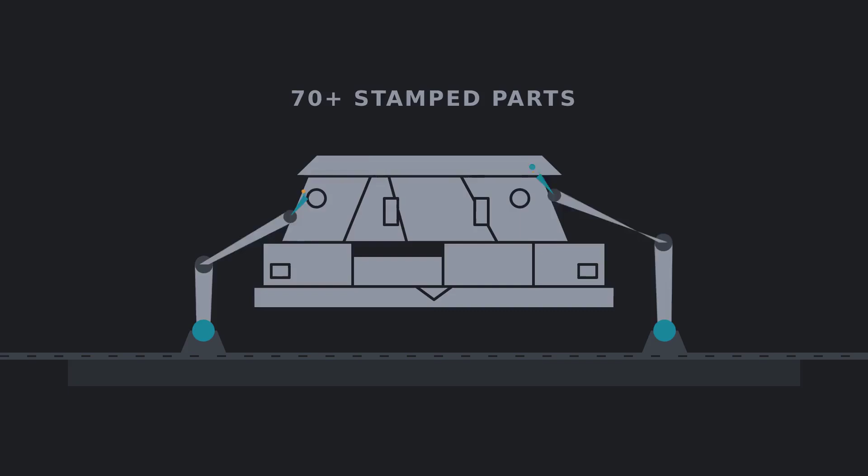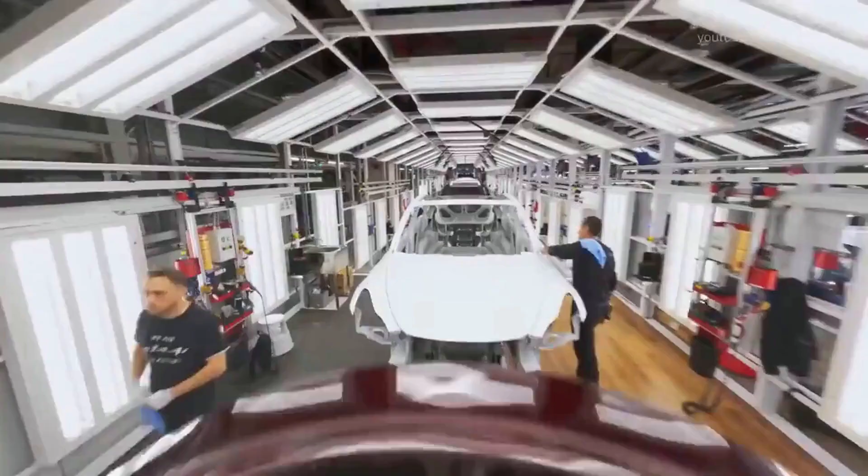Tesla's next Gigapress is being described as the machine that deletes welding robots from the factory floor, casting huge sections of a vehicle in one shot instead of stitching hundreds of parts together. That sounds like the next manufacturing earthquake, but there is a problem. The confirmed public machines are still measured at 6,000 tons and 9,000 tons of clamping force, not the 50,000-ton monster spreading through viral posts.

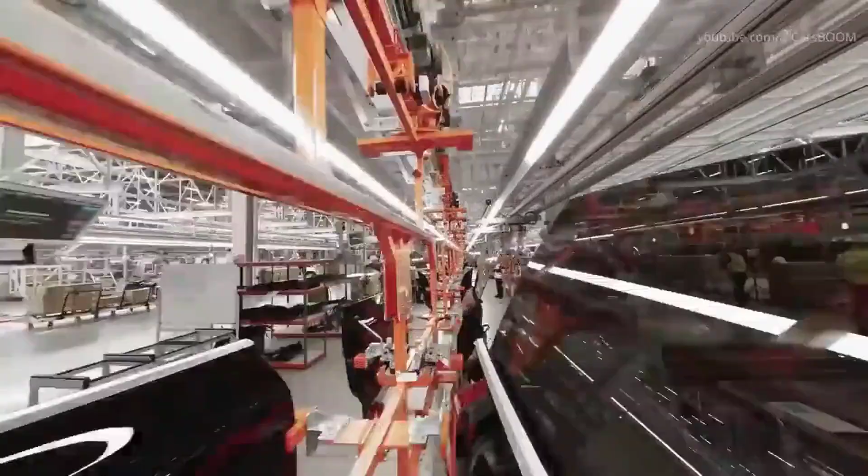So the mystery is not whether Tesla changed manufacturing. It did. The real question is what changed in 2026, what stayed exaggerated, and which breakthrough matters more than the myth. The biggest 2026 factory rumor is not the giant press. It is the claim that Tesla removed half of its welding robots because one new casting machine made them obsolete. That version is too simple, and the location is wrong.

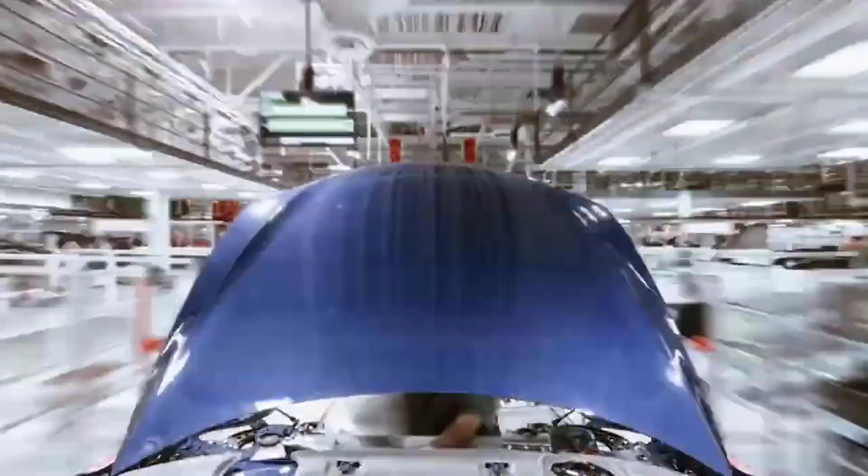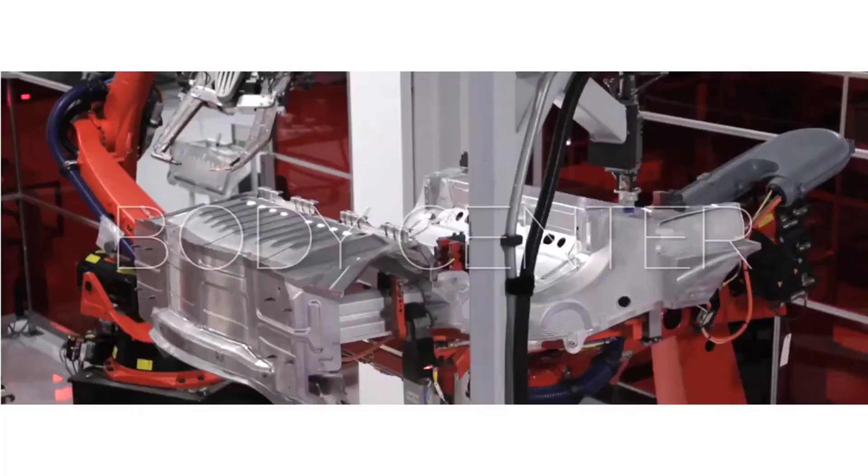The real Fremont story was about a product change. Tesla ended Model S and Model X production there, then repurposed that floor space for Gen 3 Optimus production. That matters because a line built for humanoid robots does not need the same body shop layout as a car line. Removing or relocating welding equipment in that building would not prove that a new vehicle process deleted robots. It would prove that the factory stopped building those vehicles in that area.

Cybercab belongs to a different story. Tesla has tied that vehicle to Giga Texas and the unboxed manufacturing system, not Fremont. In the unboxed approach, large modules can be built in parallel and joined later, instead of moving a full vehicle body through a long traditional sequence. That changes where labor, automation, and joining equipment are used. So if someone shows Fremont changes and says, this is Cybercab production, the timeline does not line up.

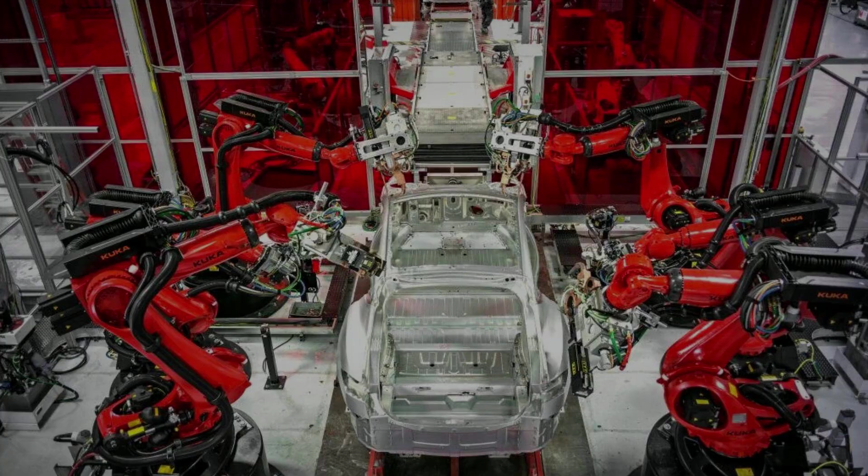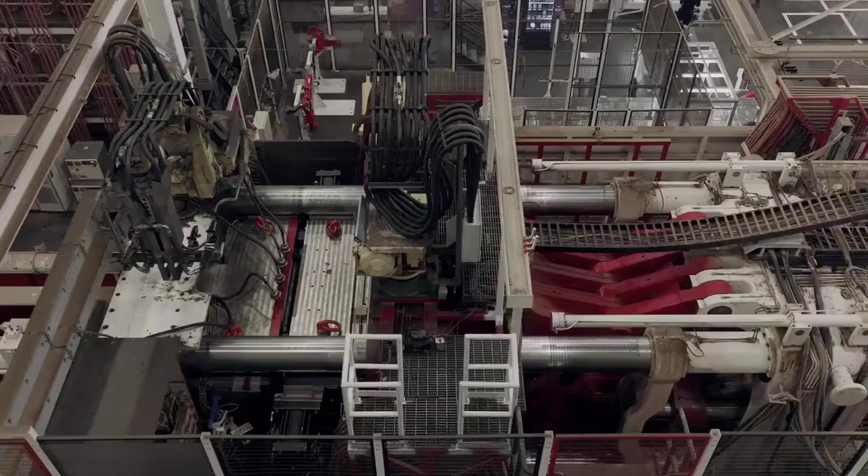Fremont's conversion points toward Optimus, Cybercab points toward Texas. Mixing the two creates the illusion that one mysterious machine arrived and erased a huge section of the factory overnight. The real breakthrough is more specific. Tesla has been reducing the number of parts, welds, fixtures, and handling steps needed to assemble a vehicle structure. Castings helped start that shift, but they are only one part of it.

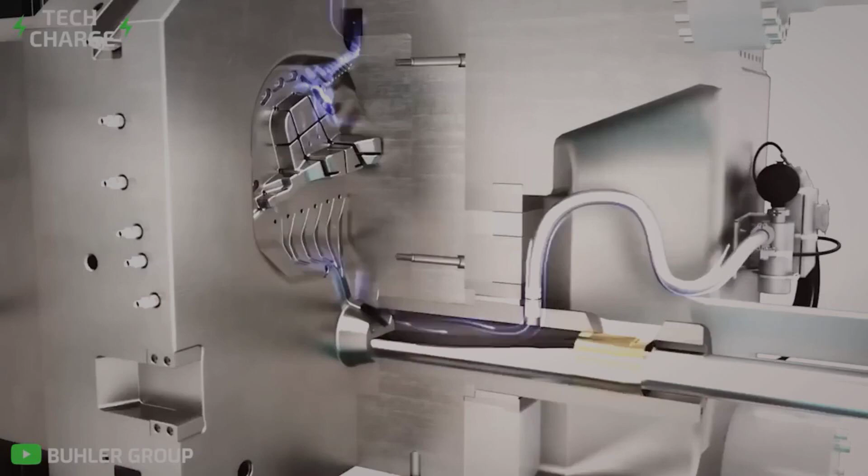If welding robots were not simply deleted, the better question is this: what actually reduced the need for traditional welding? The answer starts with Idra, an Italian machine builder that had spent decades making high-pressure die-casting equipment for the automotive industry. Tesla wanted something more extreme than a normal aluminum casting cell. It wanted to turn a large section of the vehicle body into one shot of molten metal, squeezed into a die with enormous force. That was not a normal supplier request.

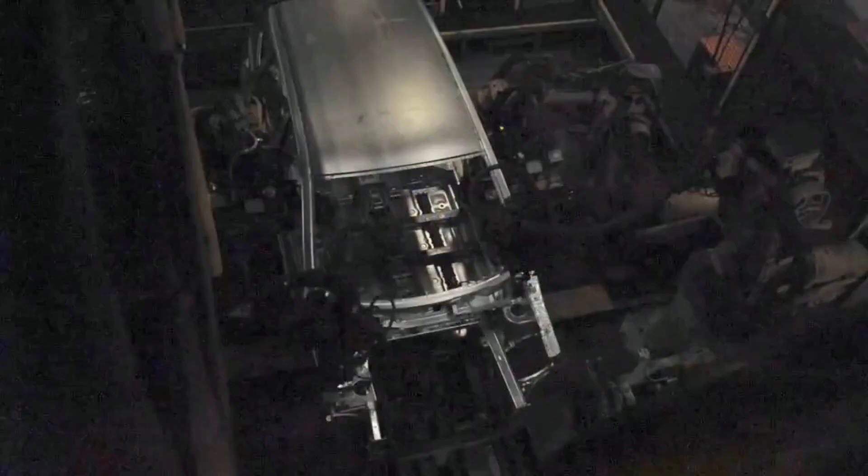Traditional body shops were built around stamped steel parts. Panels and structural pieces were pressed, positioned in fixtures, and joined by welding robots. The process worked, but it created long chains of parts, measurements, clamps, weld points, inspections, and correction loops.

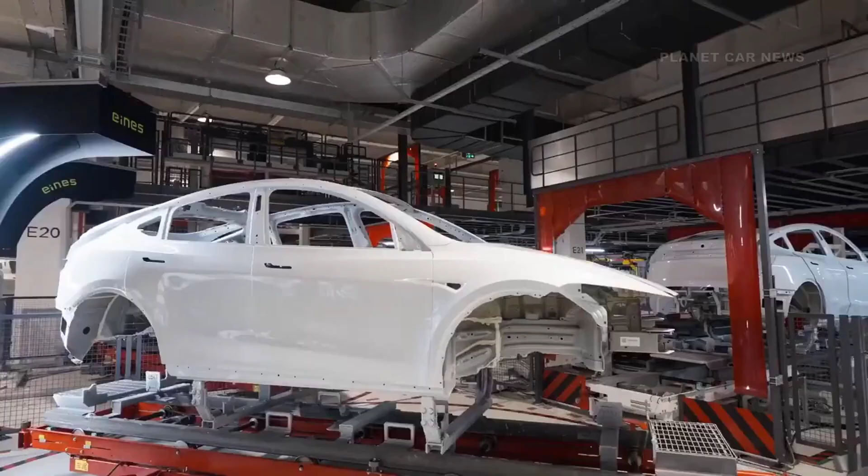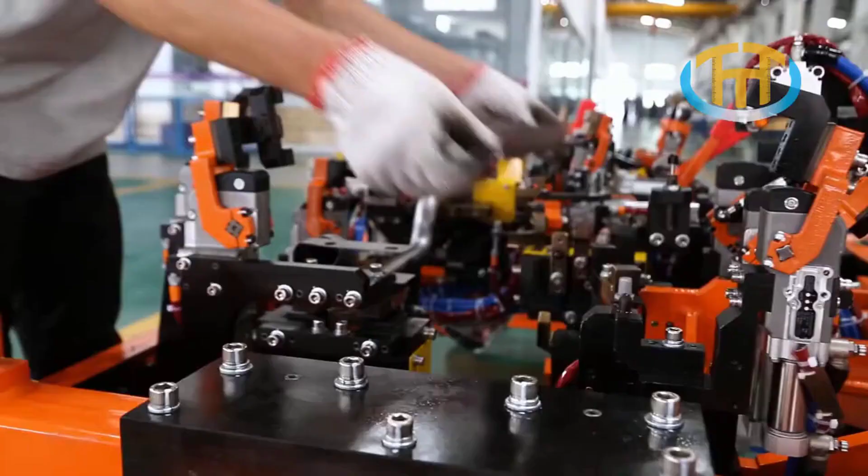Tesla pushed Idra toward a much larger machine, and the first verified breakthrough showed up on the Model Y. The rear underbody, which had previously been assembled from around 70 separate pieces, could be replaced by one large casting. That single change removed a whole section of part handling from the factory. The impact was not just that 70 became one. Every removed part also meant fewer edges to align, fewer fixtures to hold them, fewer welds to make, and fewer places where tiny dimensional errors could stack up.

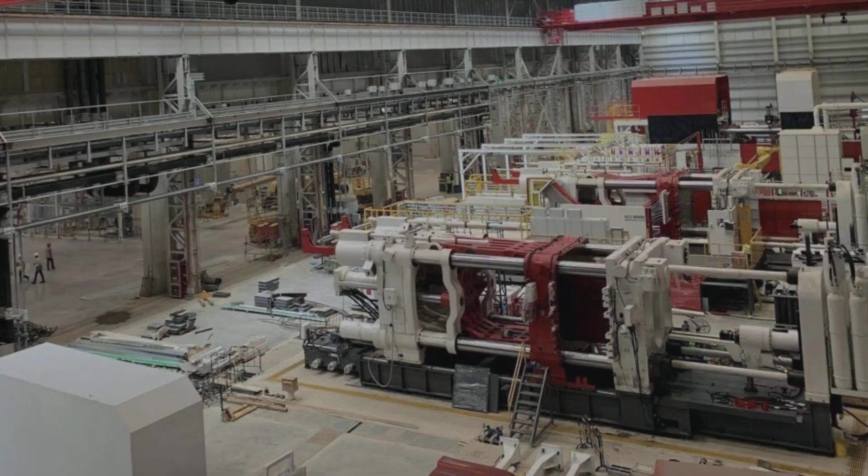In a welded structure, one small variation can force the next station to compensate. In a casting, the geometry comes out of the die already tied together. That is why Giga casting changed the body shop. It moved some of the work upstream into the casting process, before the body reached the welding line. Instead of asking robots to join dozens of components into a rear structure, Tesla could install a large finished section and build around it.

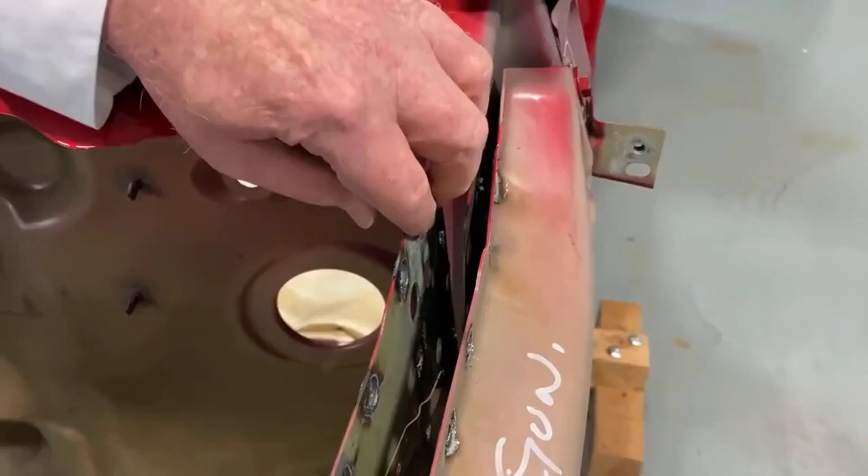There were potential vehicle benefits too. A continuous casting can improve stiffness because the load paths are not interrupted by as many joints. It can also simplify crash structure design because engineers control more of the shape as one piece rather than stitching many smaller pieces together. But this was never magic, and it was never as simple as pressing one button and deleting a factory.

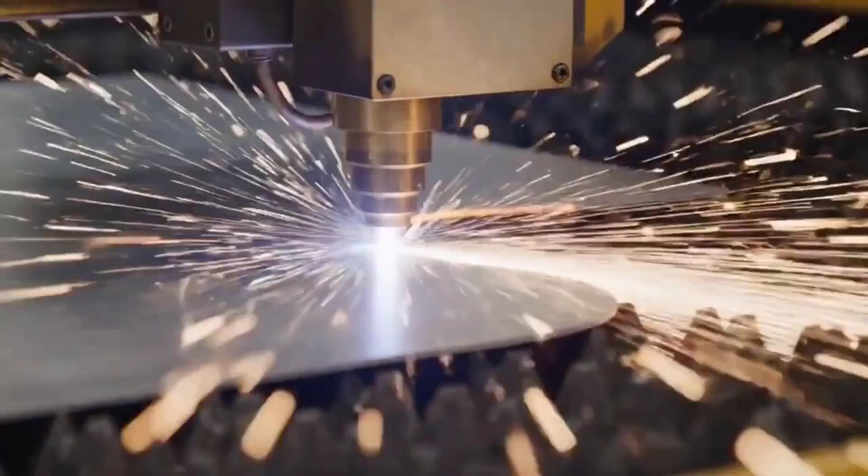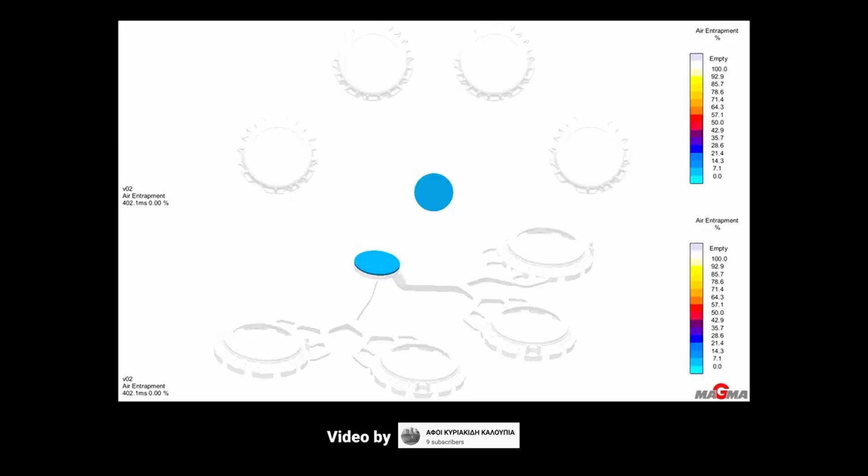Giga casting replaced a messy welding problem with a different industrial problem: molten aluminum, massive dies, cooling rates, porosity, repair limits, and machines so large that the factory has to be designed around them.

Inside the casting cell, the process starts before the press ever moves. Aluminum alloy is melted in large furnaces at temperatures high enough to keep it fully liquid, then held within a controlled range so it flows correctly without damaging the metal quality. If the melt is too cold, it may not fill the die.

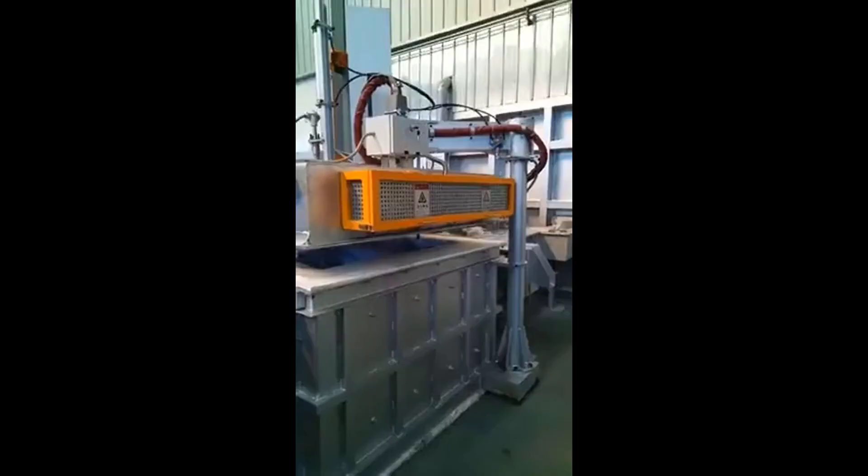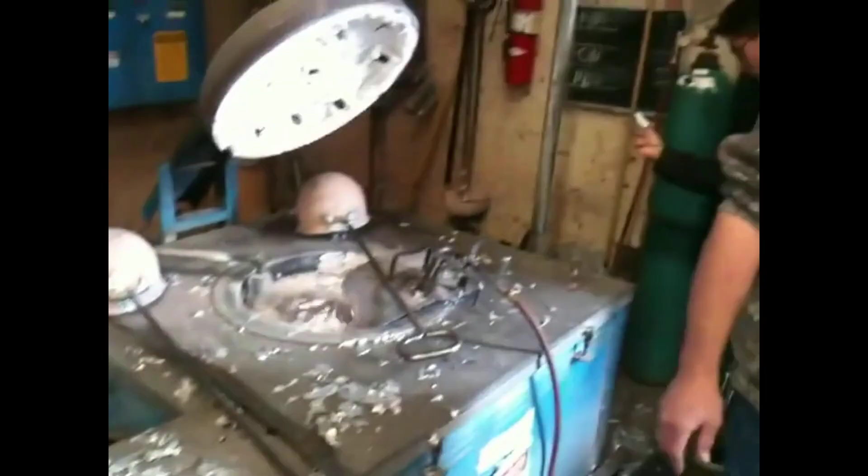If it is too hot, it can increase die wear and create other problems downstream. The molten aluminum is also cleaned before injection. It can pass through filtration systems that catch solid impurities, while degassing removes dissolved hydrogen that would otherwise form bubbles inside the casting. Operators and sensors watch for contamination because one oxide film or trapped pocket of gas can become a weak point in a structural part.

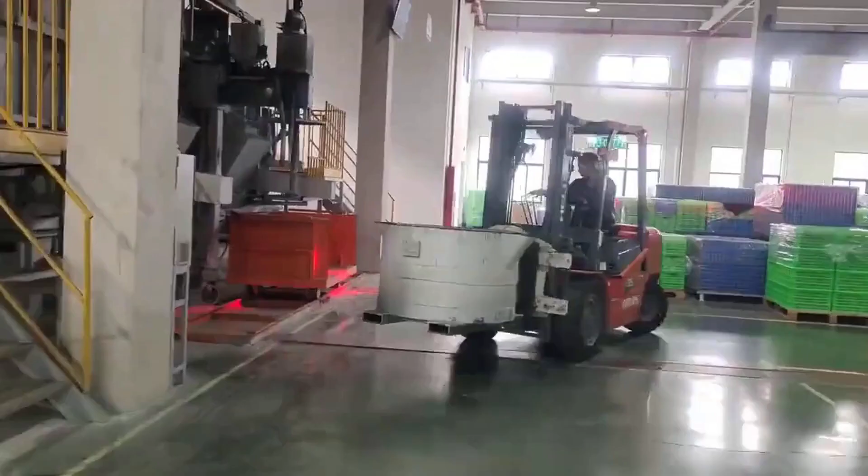At the press, the die is not just an empty mold waiting for metal. It has to be heated, sprayed with release agent, and checked, so the casting will separate cleanly after solidification. The release agent also helps manage temperature on the die surface because cooling has to be fast enough for production, but controlled enough to avoid distortion and defects.

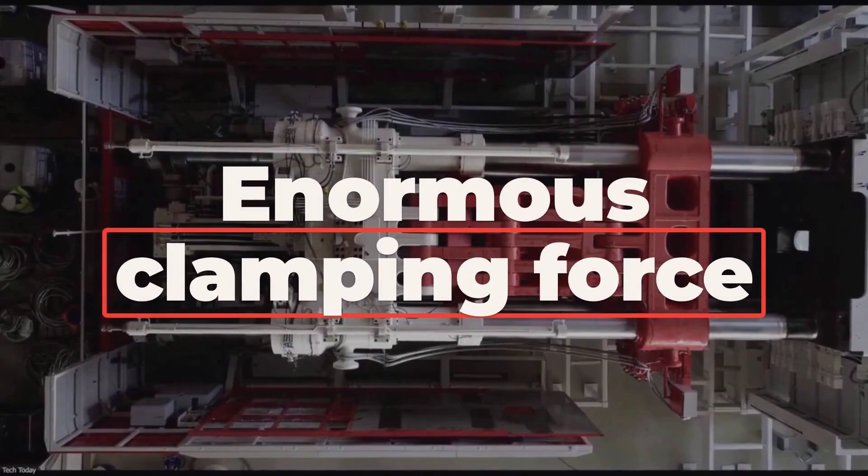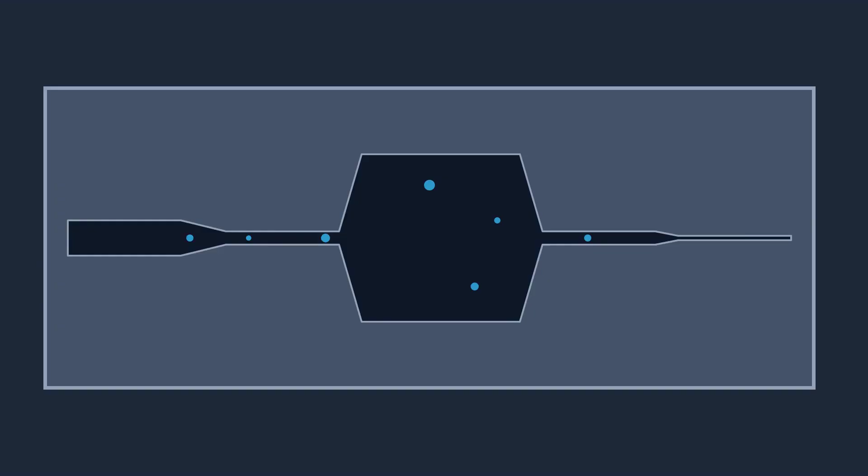Then the two halves of the die close under enormous clamping force. This force matters because molten aluminum is about to be injected at high speed and high pressure. If the die opens even slightly during the shot, the result is flash, scrap, or damage to the tool. Vacuum systems help pull air out of the cavity before and during filling, reducing the chance that gas gets trapped as the metal rushes through thin passages and thick structural sections.

The injection itself is violent and precise. A measured amount of molten aluminum is pushed into the die, fills the complex shape, and begins freezing almost immediately against cooled steel surfaces. Internal cooling channels carry heat away from the die, helping the part solidify quickly enough for a production rhythm. A real cycle is not a fantasy where one machine spits out multiple car bodies every few seconds. For a large automotive casting, the cycle is commonly discussed in the range of around 80 to 90 seconds, or roughly 1 to 2 minutes depending on the part, alloy, cooling strategy, and handling system.

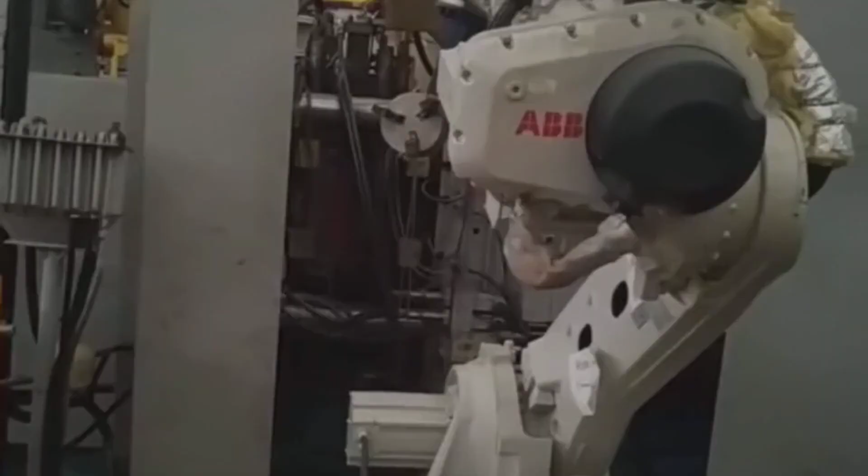After the die opens, robots remove the casting, trim excess metal, and send the part for inspection. The impressive part is not just that a huge component comes out in one piece. It is that the machine repeats this sequence over and over while controlling heat, pressure, vacuum, timing, and metal cleanliness tightly enough for structural use.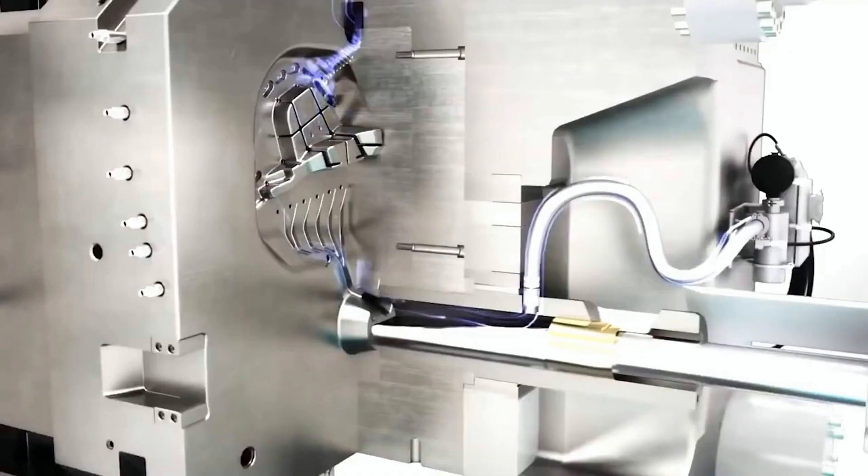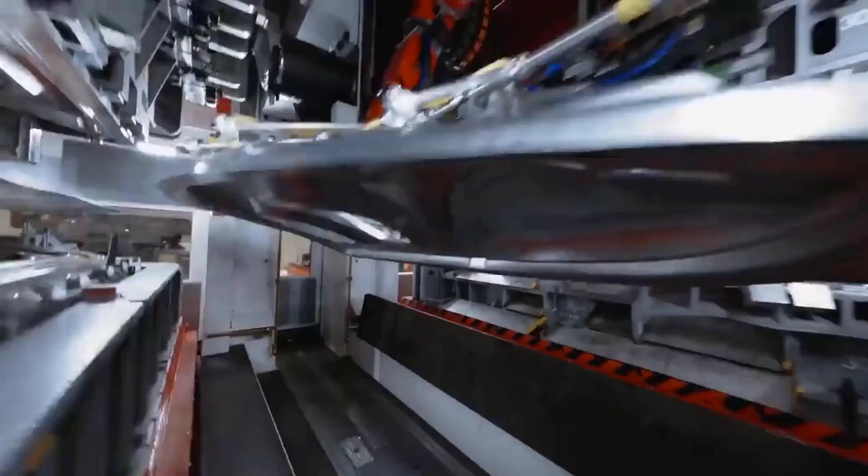And that leads to the obvious question: if this process is so powerful, why can Tesla not simply scale it to 50,000 tons overnight? A 50,000-ton Gigapress sounds like the next logical step, only if clamping force is treated like horsepower on a spec sheet. In real manufacturing, that number is not a confirmed Tesla machine, not a verified production program, and not a known target for the next vehicle platform. It is better understood as a dramatic way to describe the dream of casting even larger sections of a car.

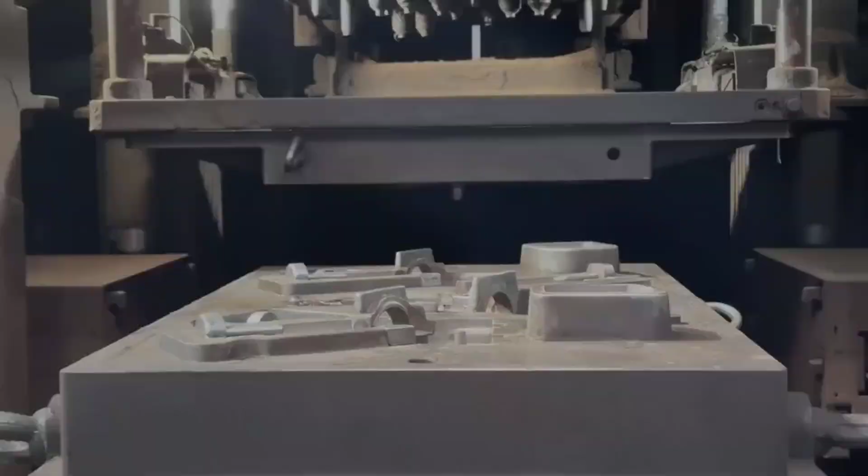The largest confirmed Tesla-related Gigapress is the 9,000-ton machine used for Cybertruck parts. For Model Y, Tesla uses presses around 6,000 tons. Those are already among the most extreme die casting systems ever applied to mass-market automotive structures, and they required new tooling, new alloys, new quality checks, and new factory choreography.

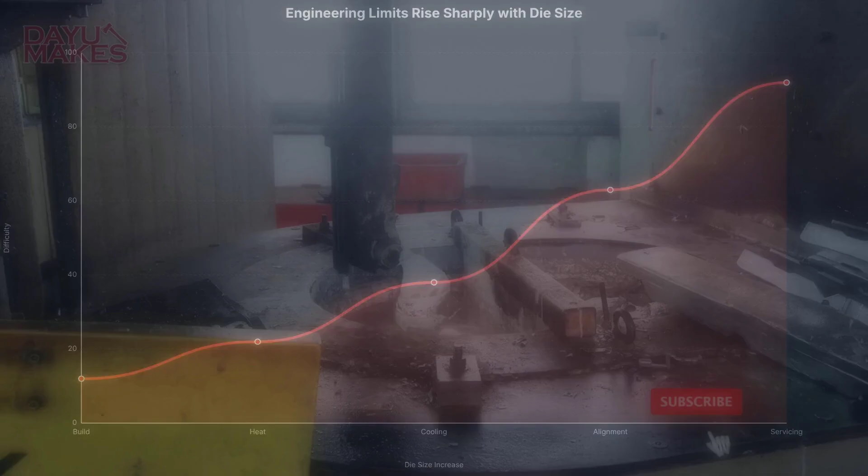Scaling from 9,000 tons to 50,000 tons is not a casual upgrade. A larger die becomes harder to build, heat, cool, align, and service. Molten aluminum has to flow across longer paths without freezing too early, trapping gas, tearing, or creating weak zones. Thick and thin sections cool at different rates, which can cause distortion or internal stress.

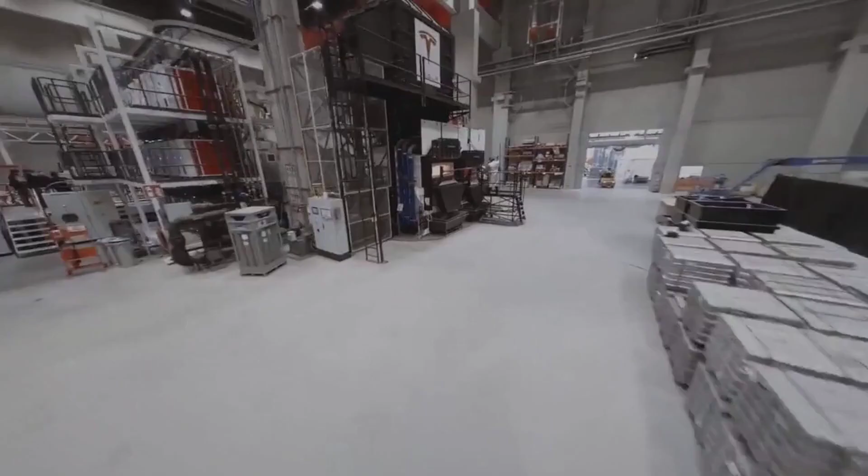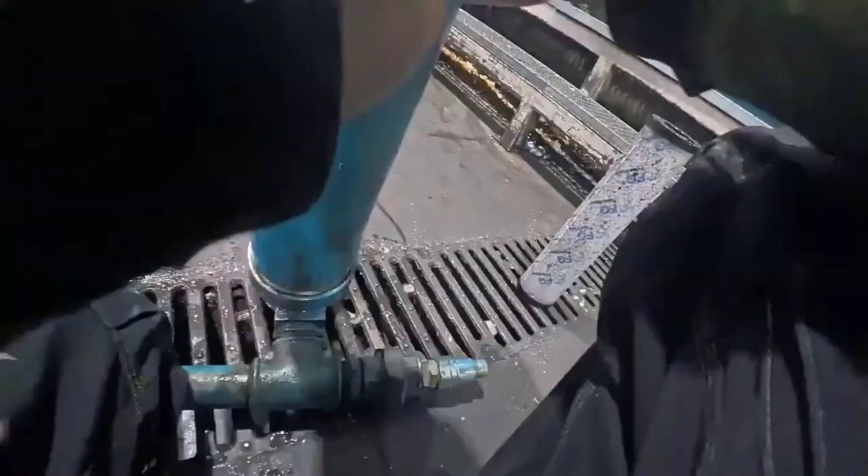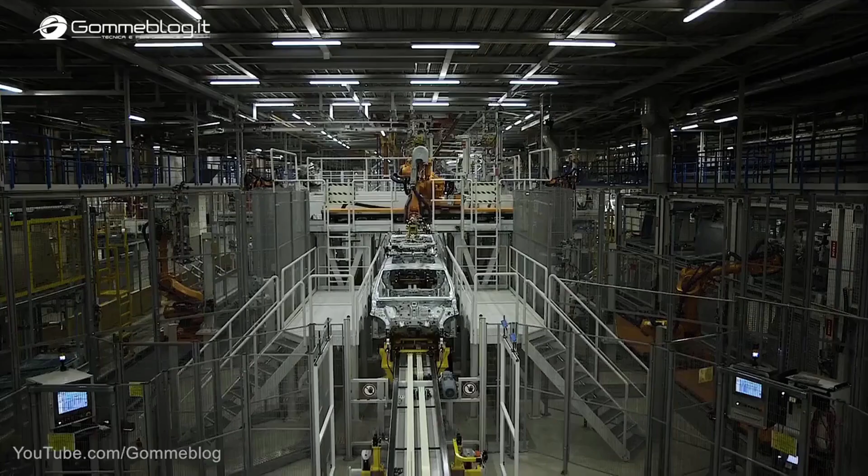The press itself would also reshape the factory around it. Bigger clamping force means larger foundations, heavier platens, more powerful hydraulics, more complex extraction systems, and much higher maintenance demands. If a die that large fails, the downtime is not a small repair problem. It can become a production bottleneck measured in lost vehicle output. Cost matters too. A casting only makes sense if it reduces parts, labor, tooling, and assembly time enough to justify the risk. At some point, making the press bigger can create new problems faster than it removes old ones.

The real story is not that Tesla has secretly deleted welding robots with a mythical 50,000-ton monster. The real story is that casting has already changed the boundary between body design and factory design. The next generation is less about one gigantic press and more about a new manufacturing architecture built around fewer parts, shorter lines, and faster assembly.

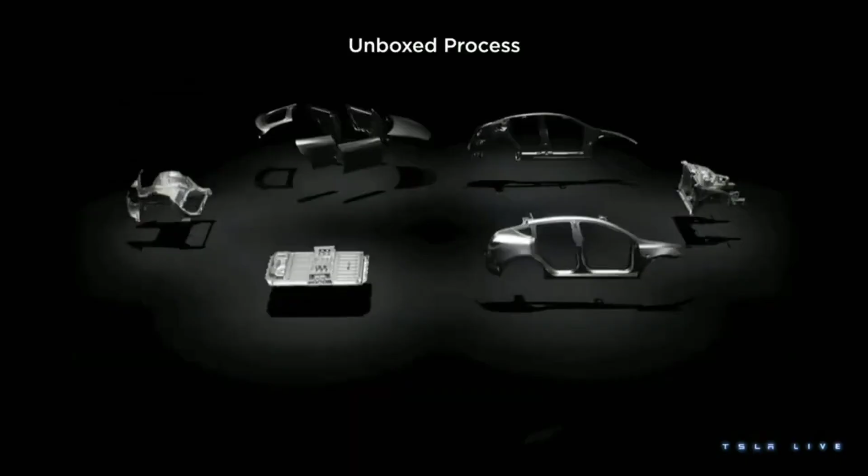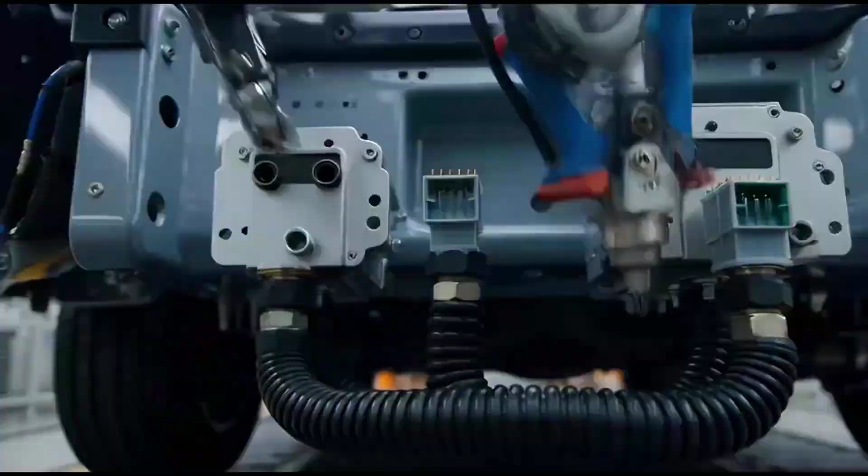The manufacturing headline behind Cybercab is not a bigger casting machine. It is Tesla's unboxed assembly method, because that changes the order in which the car is built. A traditional auto factory treats the vehicle like one object moving through a long sequence. The body is assembled, then painted, then fitted with wiring, interior parts, glass, seats, battery, suspension, and final trim. Each station depends on the station before it. If one step slows down, the delay travels down the line.

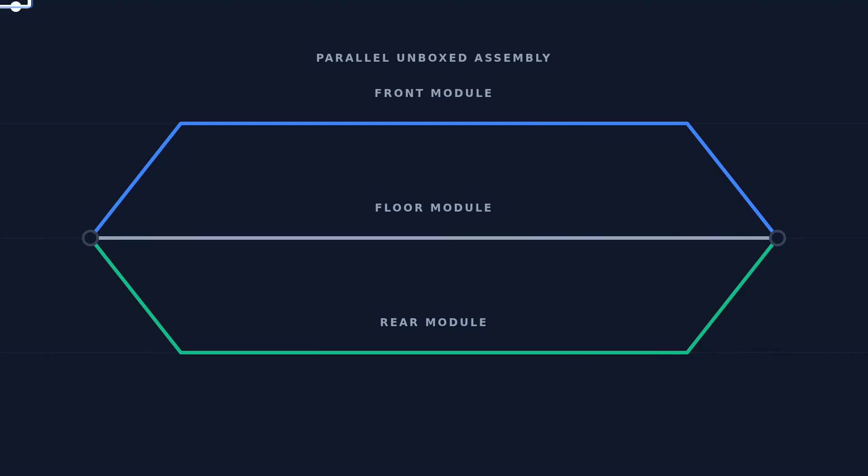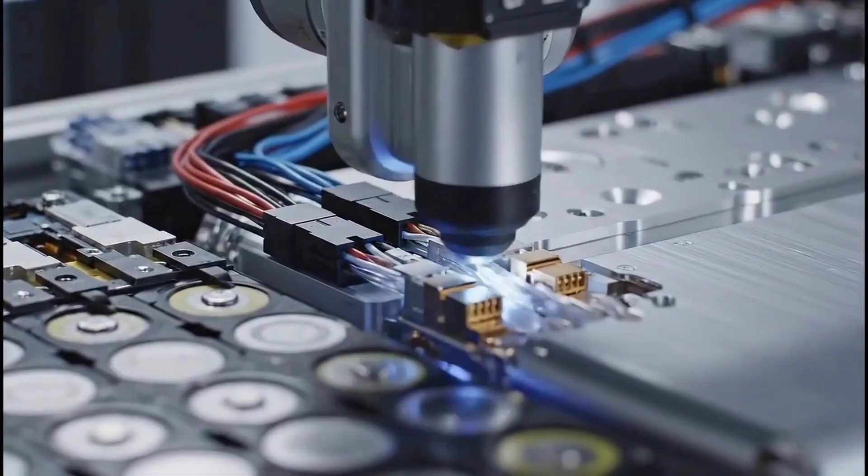Unboxed assembly breaks that pattern. Instead of pushing one unfinished car through a single path, Tesla wants to build major sections separately at the same time. The front structure, rear structure, battery pack, interior module, and side assemblies can each move through their own work areas. When those modules are ready, they are brought together near the end.

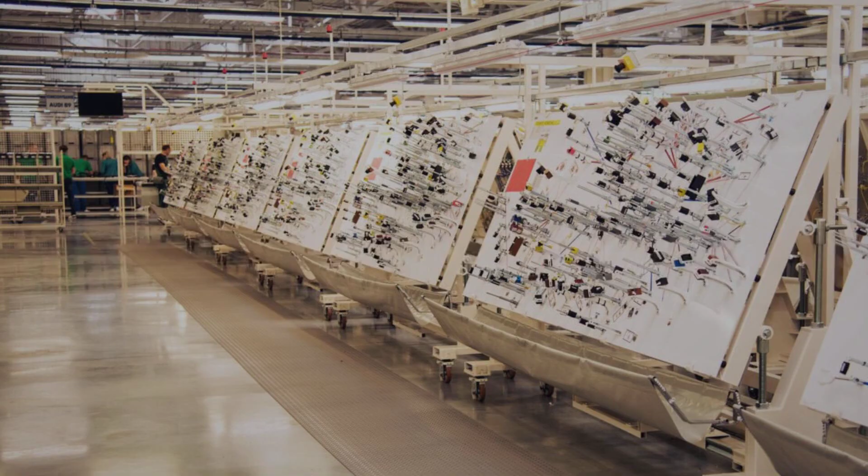That sounds simple, but it changes the factory layout. Workers and robots no longer need to crowd around a nearly complete vehicle in a narrow sequence. More tasks can happen in open access positions before the car becomes a closed shell. Seats, wiring, electronics and trim can be installed when the module is easier to reach, rather than after the body has already limited access.

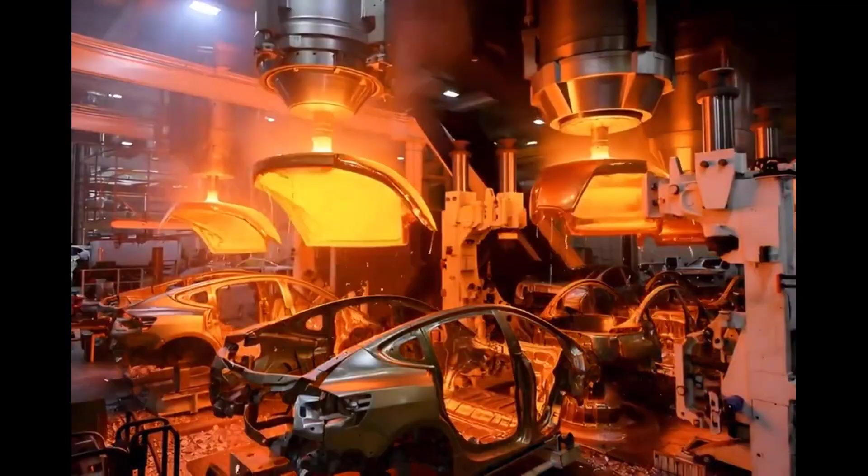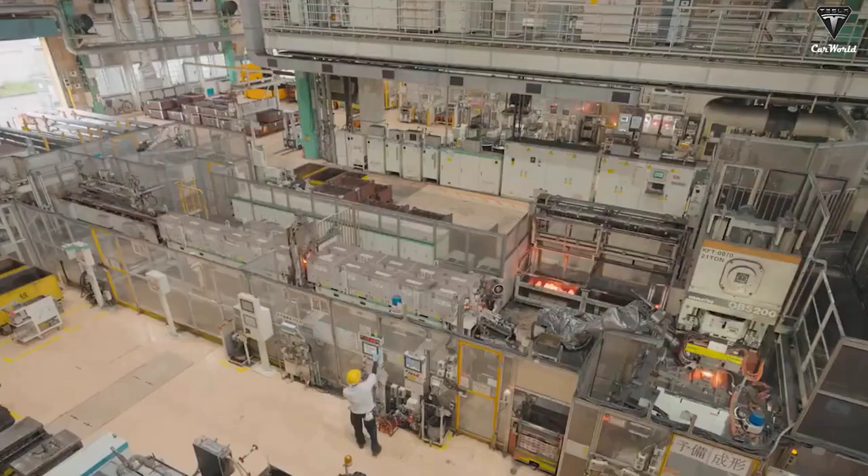Giga castings fit into this system because they reduce the number of pieces that need to be managed. A large front or rear casting can replace dozens of stamped parts, brackets, and welds. But the casting is only one ingredient. The bigger breakthrough is designing the vehicle and factory so those simplified sections can be prepared in parallel.

This is why the Cybercab matters even before production numbers are known. A two-seat robo-taxi with fewer variants, fewer options, and no driver controls is an ideal test case for a different build flow. There are fewer combinations to manage, and the vehicle can be designed around assembly from the beginning.

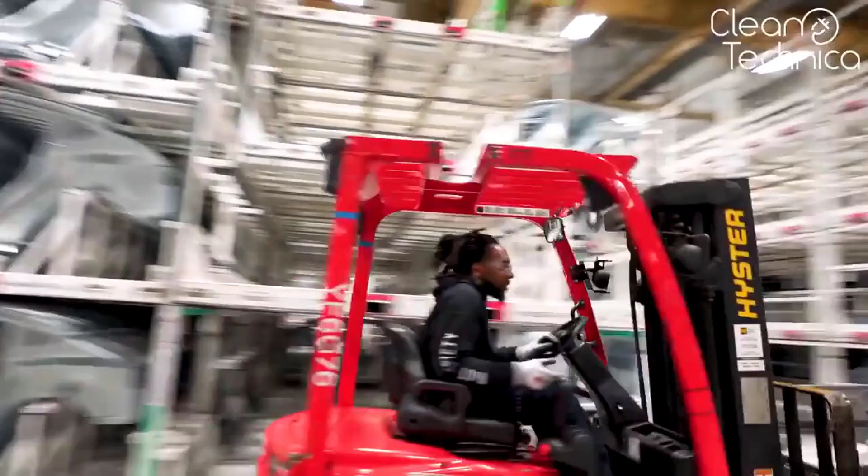If Unboxed works at scale, the payoff is not just fewer welding robots. It could mean less floor space, shorter production time, different labor requirements, and a factory where the final line is no longer the center of everything.

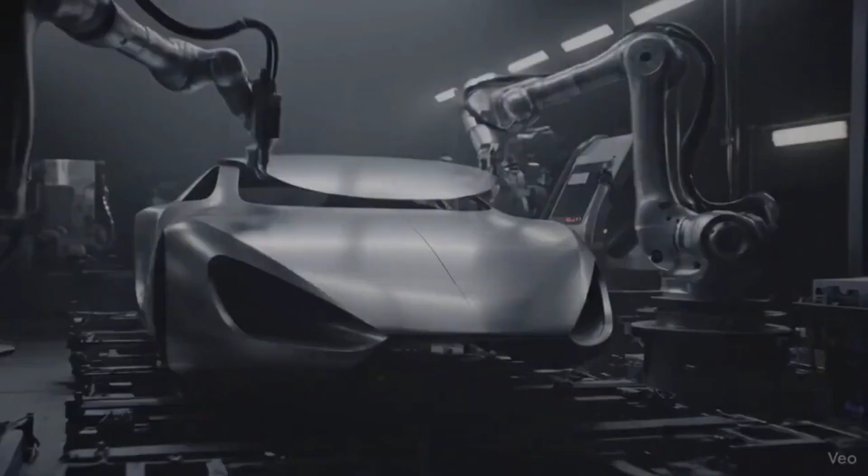So, what happens to the robots? The short answer is, many of the classic body shop welding robots lose their job, but the factory does not become less automated. In a traditional body shop, robots spend a huge amount of time positioning stamped steel panels and joining them with spot welds. If a rear underbody is made from dozens of separate pieces, each piece needs fixtures, clamps, handling, and weld points. Replace that section with one large casting, and a whole chain of welding stations can disappear with it.

It does not mean Tesla stops using robots. It means one category of robot becomes less central because the product no longer needs as many welded joints in the first place. The automation shifts upstream and downstream.

Castings still need to be removed from the press, cooled, trimmed, machined, measured, and inspected. Robots or automated systems still move heavy parts between stations. Vision systems still check dimensions. Machines still cut mounting surfaces, drill holes, and verify critical points before the casting can become part of the vehicle.

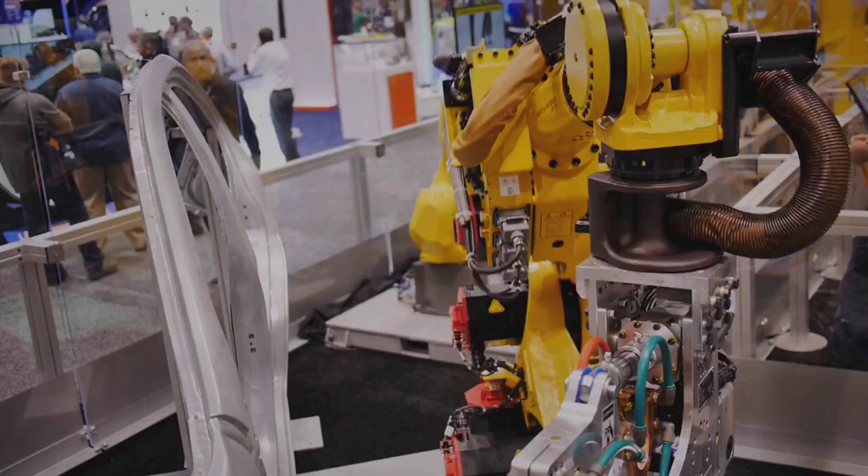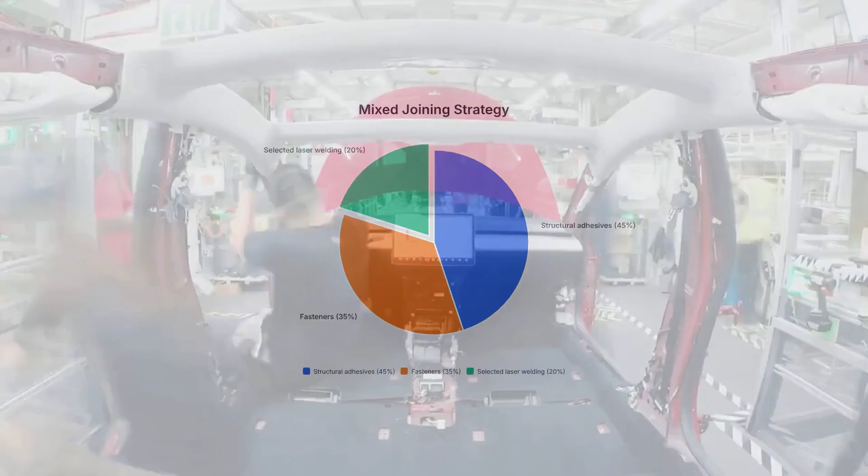Then, the joining problem changes. Instead of thousands of spot welds across stamped panels, Tesla may rely more on structural adhesives, fasteners, laser welding in selected areas, and precision assembly between large modules. Those steps still need automation because accuracy and repeatability matter even more when fewer parts carry more structural responsibility.

Final assembly also keeps its robots and automated tools. Battery installation, glass handling, seat movement, torque-controlled fastening, calibration, and quality control do not disappear because the rear structure came from a casting machine.

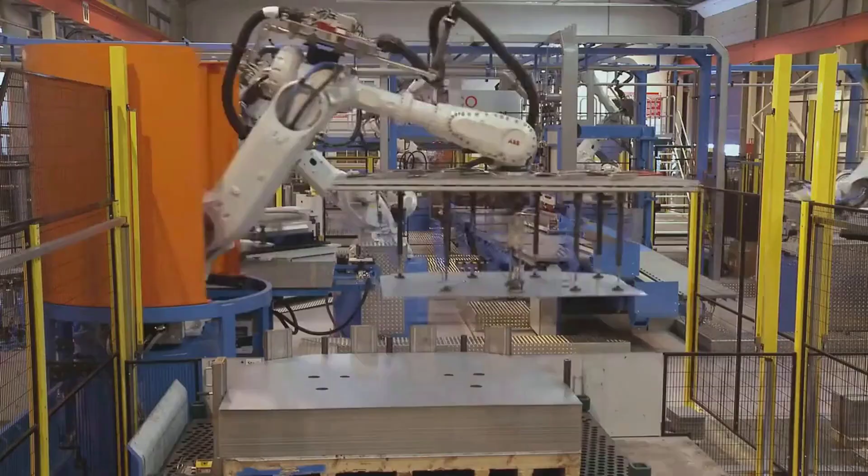So the better answer is not that Gigapress 4.0 deletes all robots. It deletes a large amount of traditional welding work. The factory still uses automation, but the machines are reassigned around a simpler vehicle architecture. And if Tesla is truly trying to shrink one department more dramatically than the body shop, the next place to look is not welding.

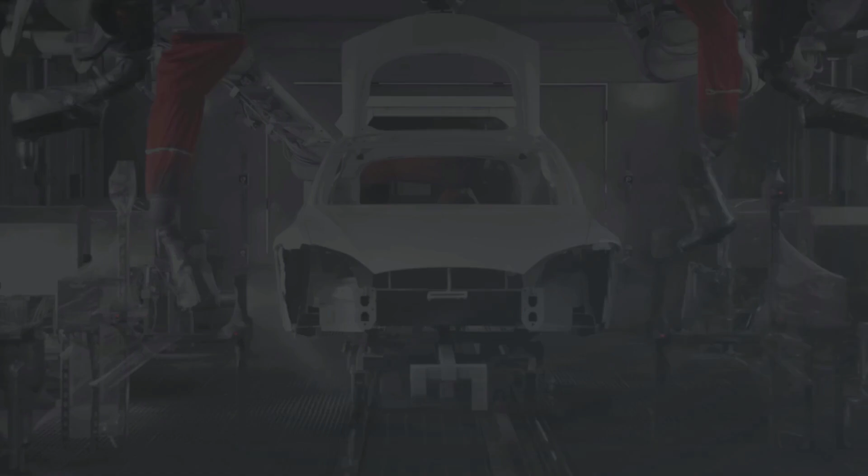Paint is one of the most expensive rooms in a car factory, and it is easy to underestimate why. A normal paint shop needs surface cleaning, pre-treatment, electrocoating, primer, color coat, clear coat, curing ovens, filtration, humidity control, and large ventilation systems to manage chemical exposure.

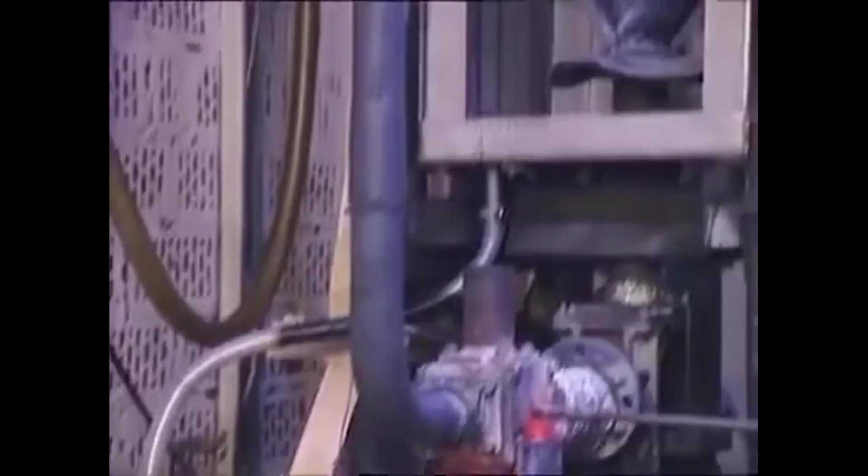That creates three problems at once. It takes time, it consumes major energy, and it produces emissions that automakers spend heavily to control. The paint itself can release volatile organic compounds, and the ovens add another energy penalty because every painted body has to move through heated curing stages.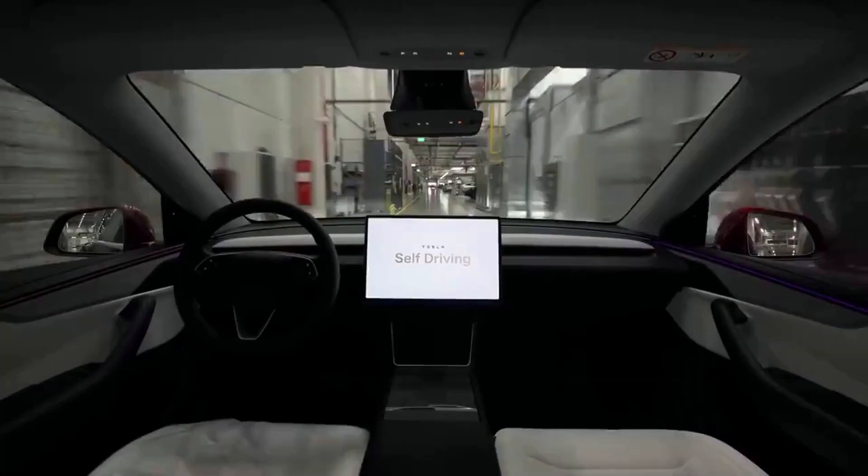That does not mean the entire vehicle suddenly needs no finishing work. Glass, structural parts, closures, trim, and other surfaces still have their own manufacturing requirements. But for the panels that use this process, Tesla is targeting a much shorter color processing step, lower emissions for those parts, and the removal of paint shop volatile organic compounds from that specific operation.

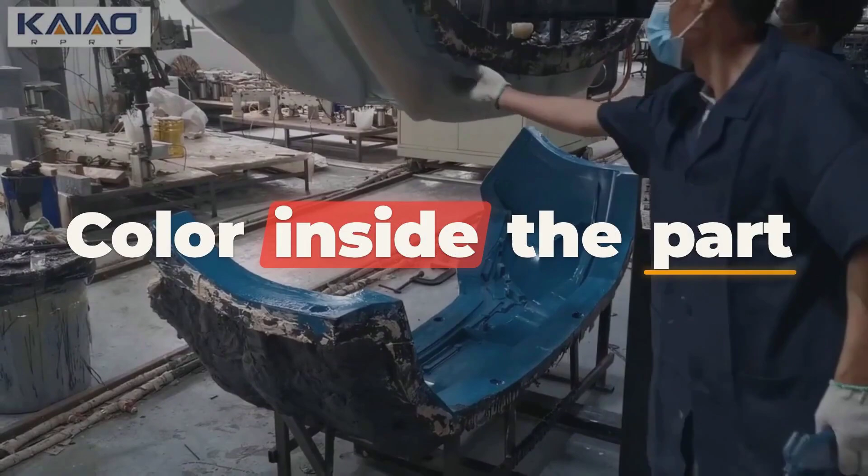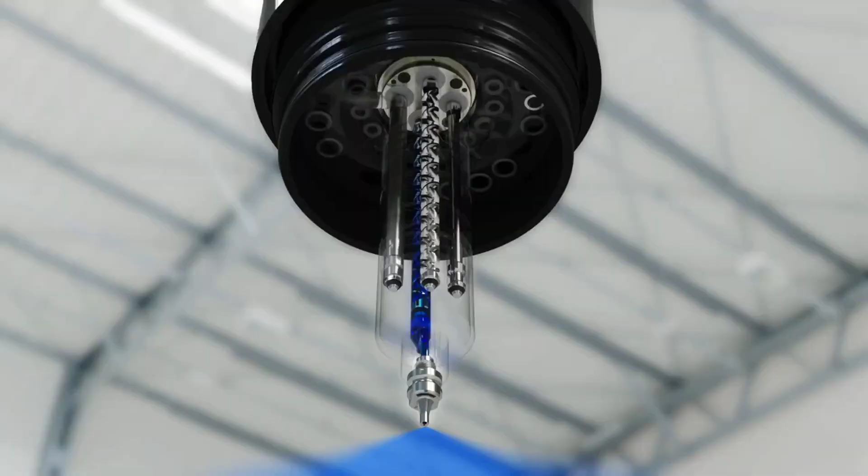The manufacturing payoff is not just environmental. If color can be created inside the molded part, the factory can avoid some of the bottlenecks that make paint shops so slow and capital intensive. Fewer spray stages, fewer curing constraints, and fewer chemical control systems can change the economics of the vehicle.

That is the twist. The loud story was about a mythical Gigapress that deleted every welding robot. The quieter, real breakthrough may be a color-in-panel process that attacks one of the oldest and most expensive parts of car production: paint. The important signal is that Tesla is no longer alone in chasing this direction.

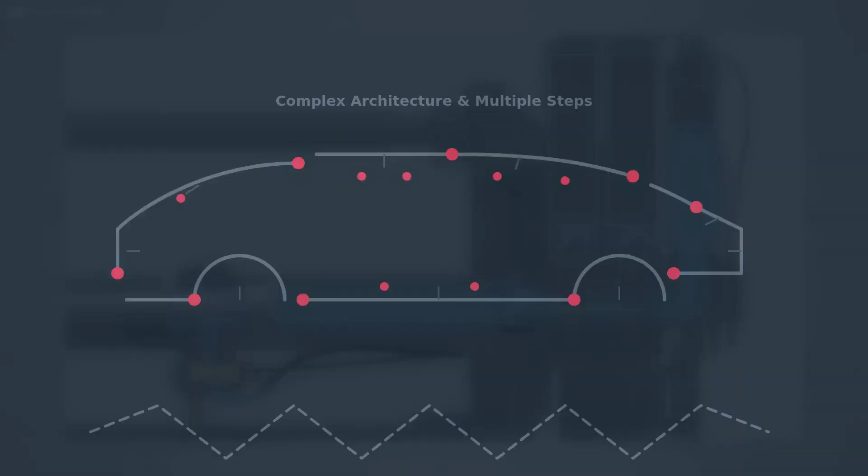Across the industry, automakers are studying large aluminum castings because the basic attraction is obvious. Replace many stamped and welded parts with one or two major structural pieces, then build the car with fewer joints, fewer fixtures, and fewer assembly steps.

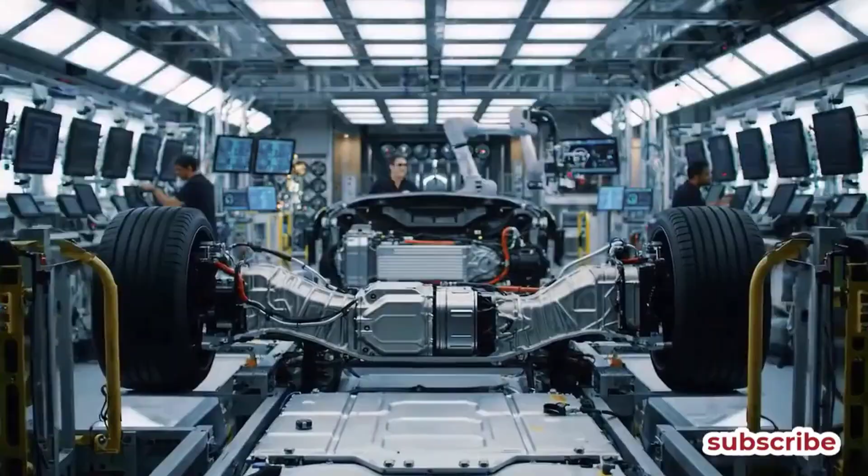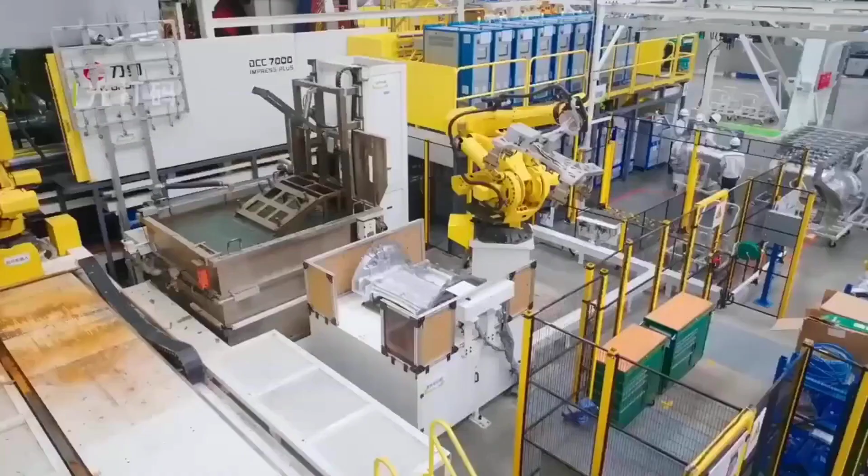For a competitor, the calculation is not just about copying Tesla. A large casting can reduce part count, shorten the body shop, cut robot stations, and make a new electric vehicle platform easier to assemble at scale. In a market where margins are tight and battery costs still matter, removing complexity from the structure is a serious advantage.

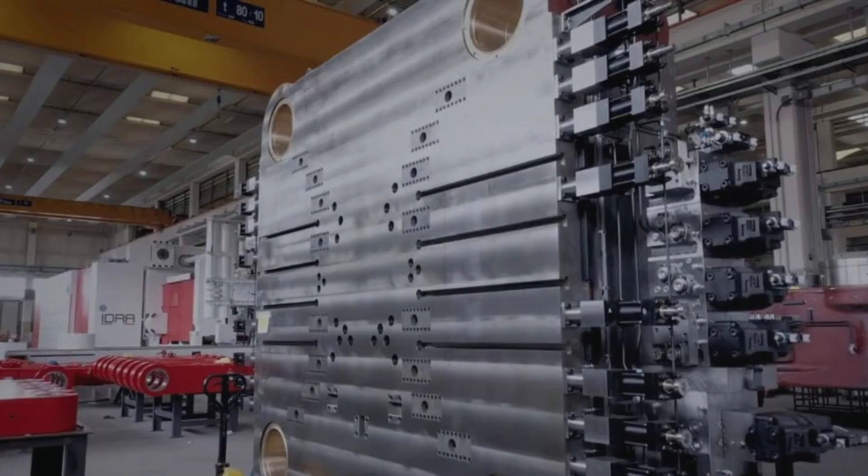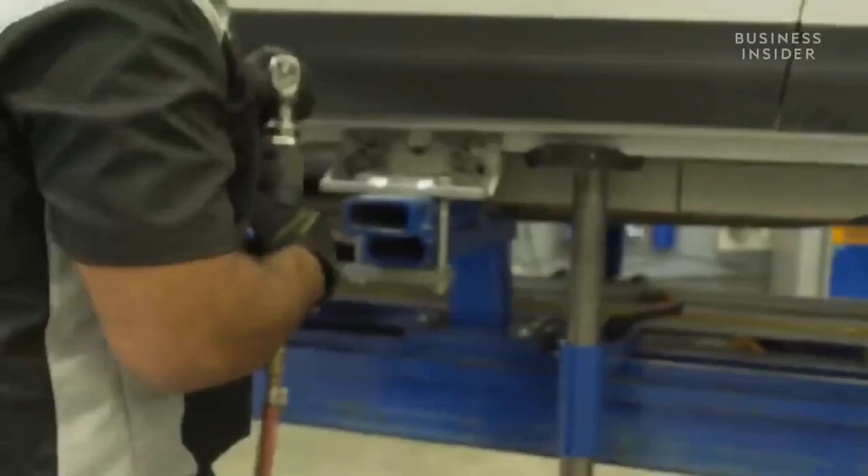The trade-off is that big castings move risk into a different place. If one huge casting has a defect, the scrap cost can be high. If the casting process is unstable, production can suffer quickly. And after the car reaches customers, repairability becomes a real concern, because a damaged large structural section may be harder and more expensive to fix than a conventional assembly made from smaller replaceable parts.

That is why insurance companies, collision repair networks, and manufacturers are watching this carefully. Giga casting can make production cleaner and faster, but it can also change the economics of accidents.

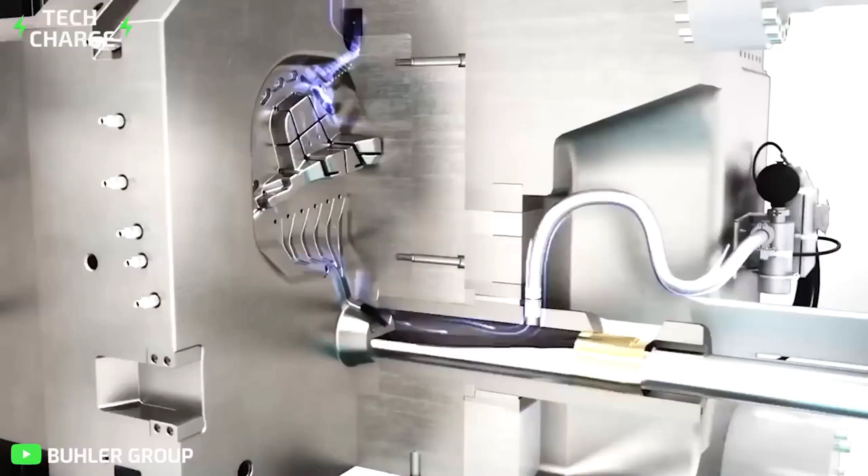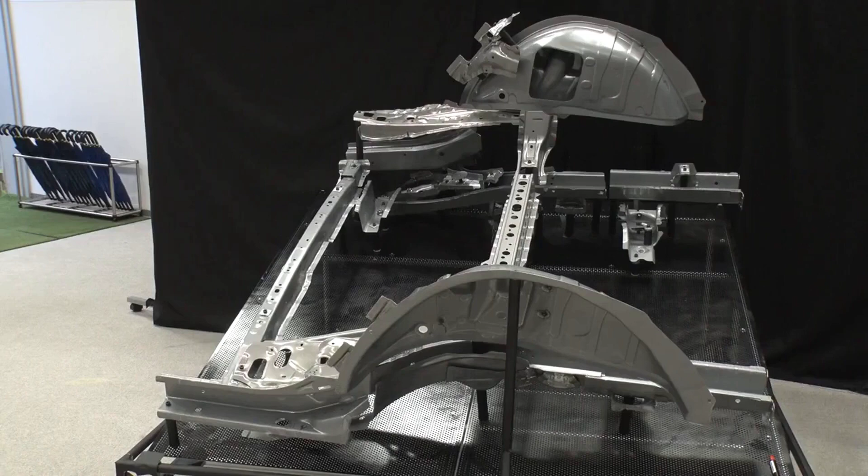So the real story is not that every automaker believes in a fictional 50,000-ton monster press. The real story is that Tesla pushed the industry toward a manufacturing race, and competitors are now deciding how much of that risk they are willing to absorb.

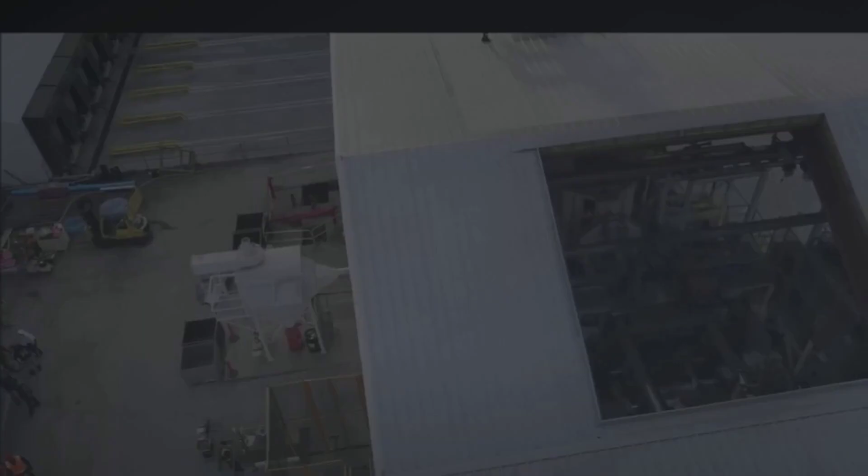So the verdict is clear. There is no confirmed 50,000-ton Gigapress, and no proven mass deletion of half the factory robots. Tesla's real breakthrough is more grounded and more important. Gigacasting, unboxed assembly, Fremont's Optimus conversion, and color-in-panel production all point toward fewer steps and faster builds.